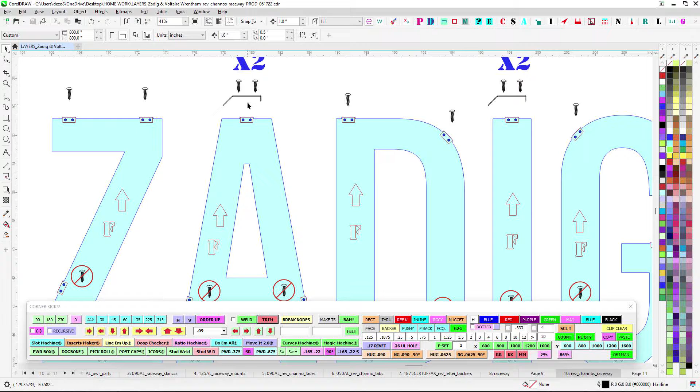So follow this guide. I went ahead and sent this to print out. So you're just going to spring tension where the screws would be visible. Just go ahead and spring tension those, and then like I said, these screws will keep the backers from ever flying out. But these are just to hold the LEDs, and that's it. I put strain reliefs right here so that way you can guide the leash and then strain relief it. You're going to take those leashes and then run them through the top of the raceway through the little hole there.

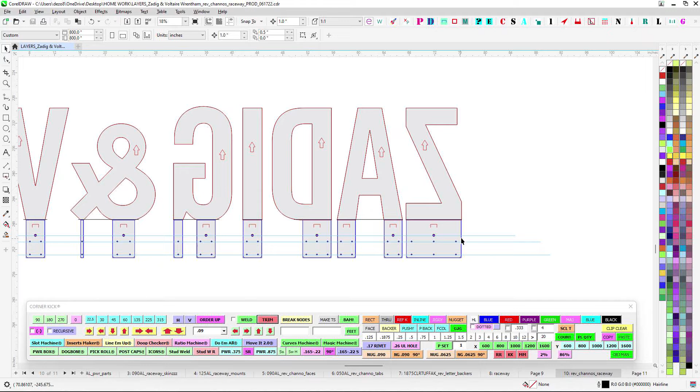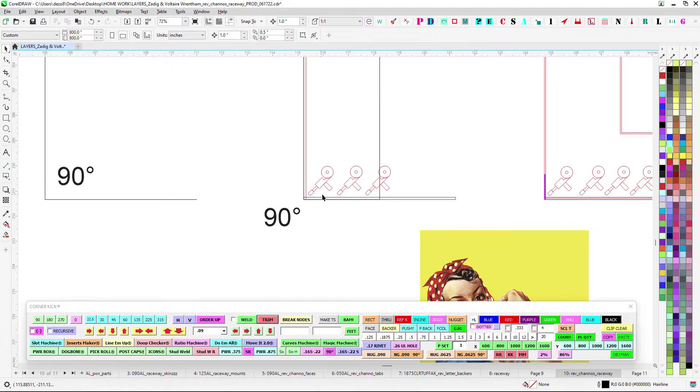And then the channel letters, I already talked to Adrian a little bit, but just to give you a heads up. You can see where this magenta here is the return. And then the blue right here is the flange. So it's real important, you have a 3-inch deep return, but the flange itself is 6 inches. So you want to make sure that you weld this 050 to the 090 really well. And you can go ahead and run some tacks along the actual bend flange as well.

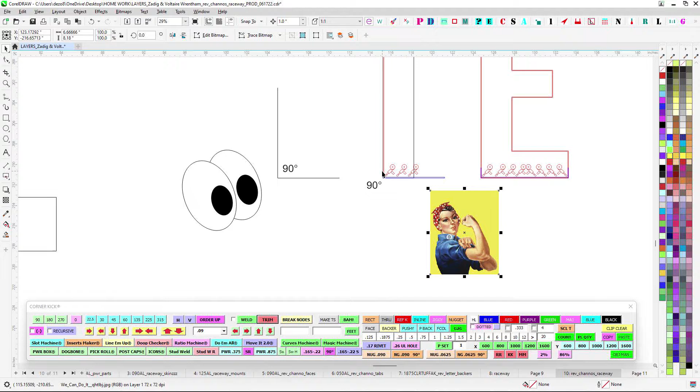I know there's a chance of burn through, so watch out. Maybe put it on a backer piece or whatever for a heat sink. We want to make sure this is nice and strong, because that's what's actually holding the letter up. But you got to make sure that you keep this 90, because otherwise, if it's incorrect, obviously the letters will be crooked, the A and the I and all that will be tilted. So just make sure that you got that welded up nice.

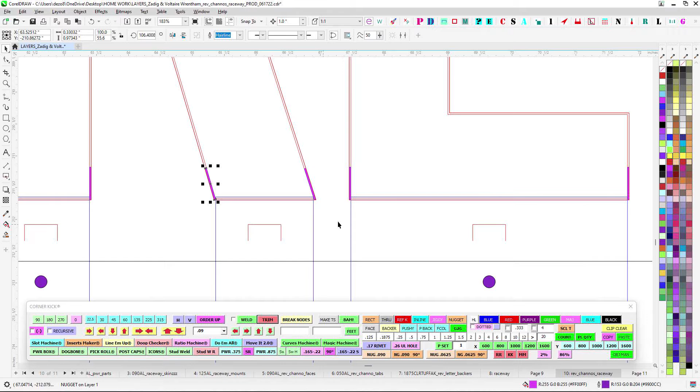What I tried to do is make it so the return could run past on the ones that can run past, so you can make it go long. So like this E here, you can make this piece run long and then sand it flush, and that's fine. The A, all of these are fine. But the round letters, obviously, they have to die into the flange.

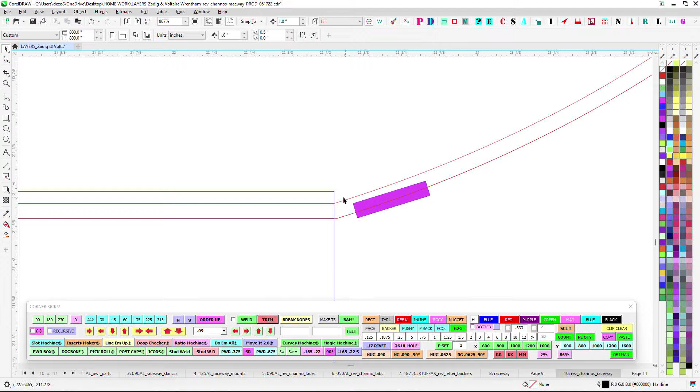Now that presents a challenge because you don't want to have a gap right here. If you have a gap and you try to close it with weld, it's not going to be very strong. Plus, it's going to pull it, and then this will no longer be 90, and you got big trouble there. So you might want to consider starting from here and adding more seams than you normally would. So this one here, I would lay this out, have it go this way, maybe put the seam at top, and then make this one come along. That way you can adjust up here, start fresh, and it's butted up against.

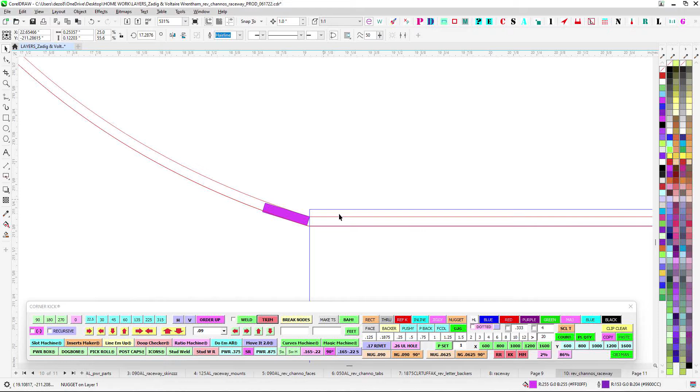That way you can get a nice weld right here. Otherwise, you don't have the luxury of letting this run long and then doing your trim, because if you trim it a little too short, it's going to pull it shut and it's not going to be good. So you want good fitment. With welding, you always want good fitment.

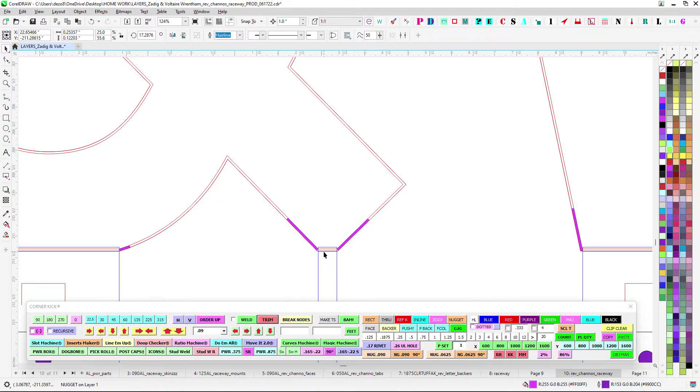Same thing here, it dies up against. So I would maybe put your seam here. So what I'm saying is on some of these, you might have more seams than normal. You'll see what's up. If you guys can get it right there, that's great. But otherwise, I would start this and maybe put a seam here, even though you would normally start from here and go long.

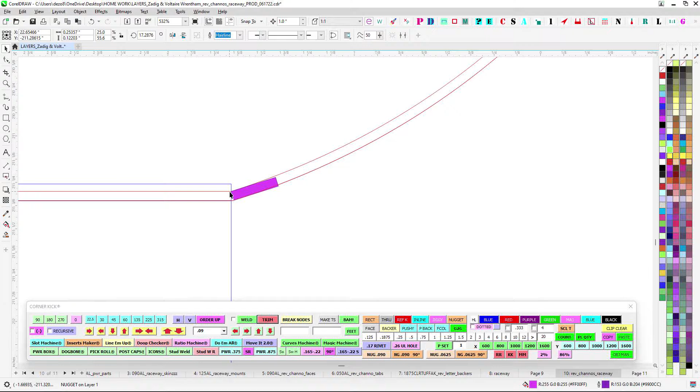But because these die up against, you might end up just kind of going long here and then just put your seam. That way you can have ultimate adjustment and you get a nice fit. So that's all. Just keep in mind, you might do these a little differently because you got to start from down here. On the ones that kind of die in, like I say, the stuff that's long, fine. Anyway, so that's it for the letters. Those are already all sent. I know you guys will knock that out.

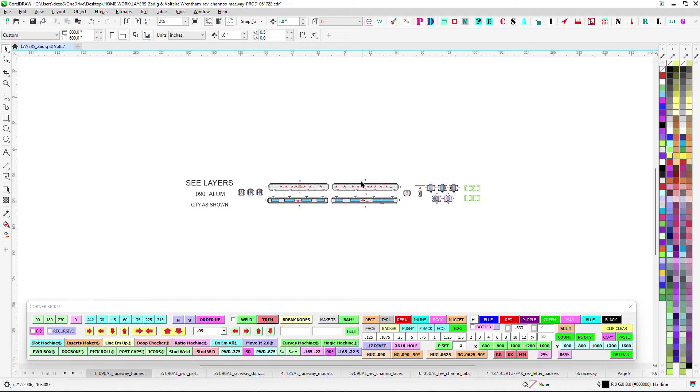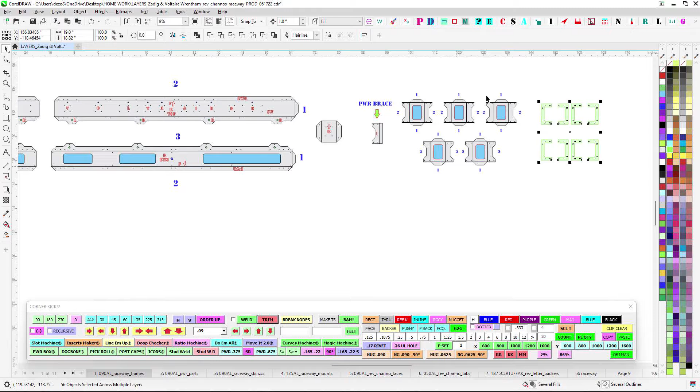So let's get into the Raceway. Let's go to lay of the land. So you got Raceway parts. You got end cap, couple of mids that are on the end caps here. And then for shipping, this is broken into 2 sections. And then you have the top and bottom sections of both. You have the end cap here. And then you have some mid braces, plus a little custom brace. Keep an eye out for that little guy. And then you got your jigs. In the interest of saving time and money, more of like a jigless design. So all your center braces don't have jigs, kind of like the white Raceways.

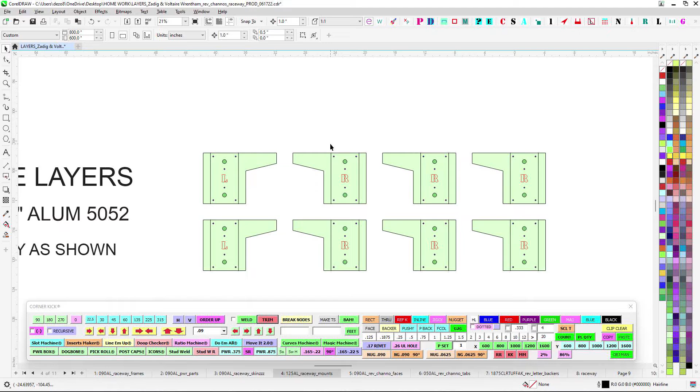We've got 090 power supply box. I'll go over that, super trick, but we got to put the power in the Raceway, so it's just always fun. You got 090 skins. We'll go over that. And we've got some 1/8" Raceway mounts that will go inside as well. I'll show you those. And again, you already got those. I already sent all this, so you got your tabs and all that for your other stuff.

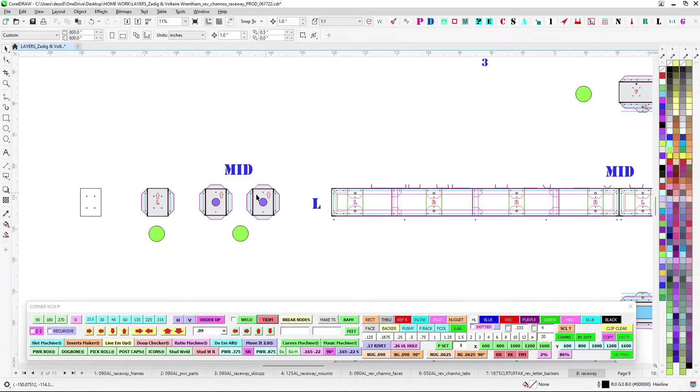Okay, so normal Raceway, quote unquote. None of our stuff's normal, but you're gonna go ahead and put your end pieces in. Again, look for the mids. The mid pieces have the holes here and here. They're exchangeable. They're symmetrical, so either one goes on either one. But I do have like a left and a right. Let's just talk from the start here. We've got the left and we got the right side. So the Zadig and the ampersand will be on one side, and then the Voltaire will be all one word here, and then Voltaire will have power over here. So we'll go over that.

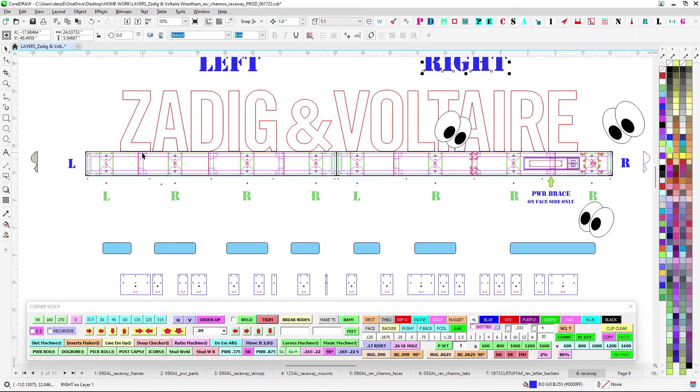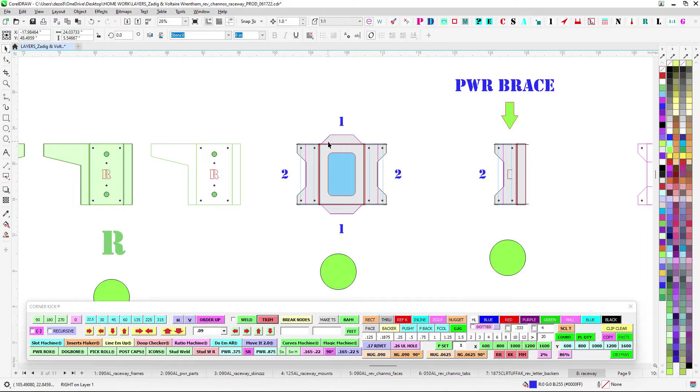So you'll just put your brace jigs in, your corner jigs and all that. And then these guys will fit inside, and you can go ahead and just tack. That's why I have a little example. You can tack on the inside, clean it up, tack along the inside there. This will make this nice and strong. Those guys here are here. They allow power through, all that. The only custom one is this guy here. It's only going to be on the face side, and I had to kind of chop it because that's where the power is going to be. So it's just one of these guys here, but just sliced off. And it's just going to help hold the face together.

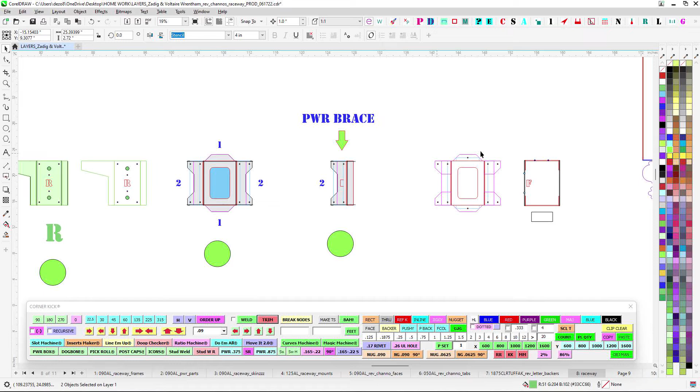Now you see the green here, you got R, R, R, and L, right? That's the back braces. That's where the power or the mounting is going to be. So that's these guys here. Bend these up, and these look very familiar. This will have a long snout that sticks out. That way, yeah, that rhymes. That way this gives full support to the letters. So you'll go ahead and tack that to the front, tack it along like we do. And because that way it fits in the brake, you only have one side and then the other.

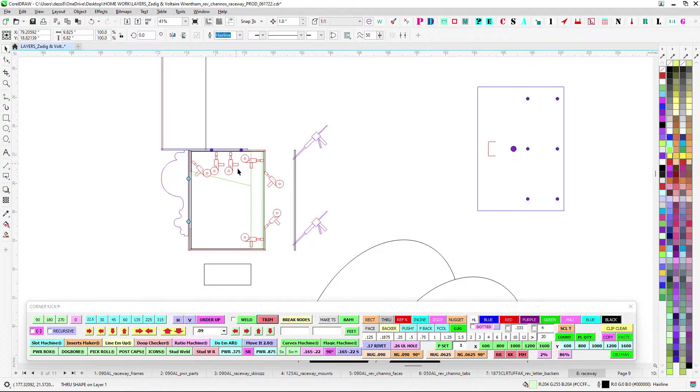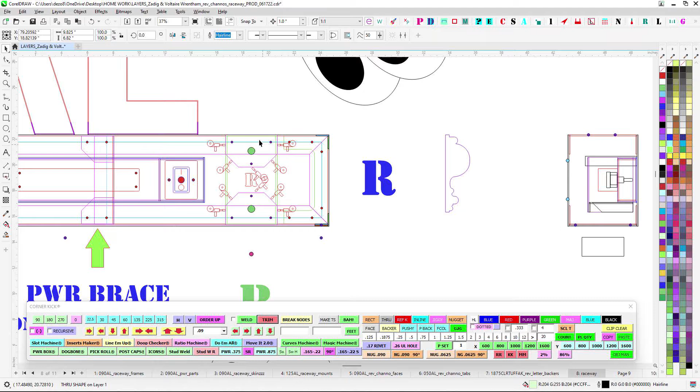So make sure you bend this up. I don't have this marked, but go ahead and bend this up 1, 2, right? You know how we do. Or I'm sorry, it'd be 1 and then 2. Don't trap yourself. So get that welded in. Those go towards the back, and that's it. So tack those in. But also have the back flange pieces that'll come down. So that way it's like a stack. It'll be the 1/8", and then you'll have the hole here. You'll have the 1/8" welded directly to the 090, and then the 090 will be stacked onto the skin. So it'll be a nice, solid, thick metal right there to make sure that this never comes out.

So once you got your Raceway put together, put those back braces in there. You can see where these come down like that. You can tack all along there and kind of clean it up, and that way those braces will be in there nice and solid.

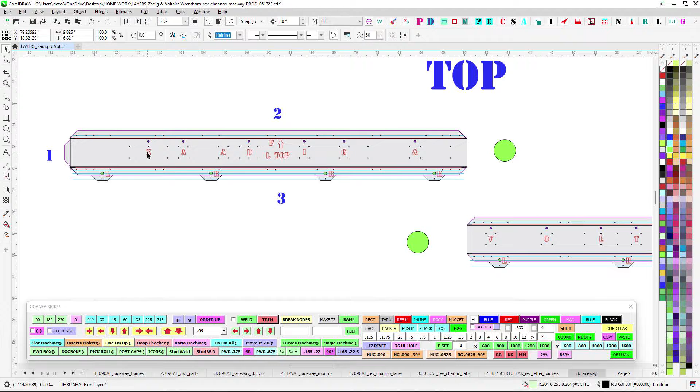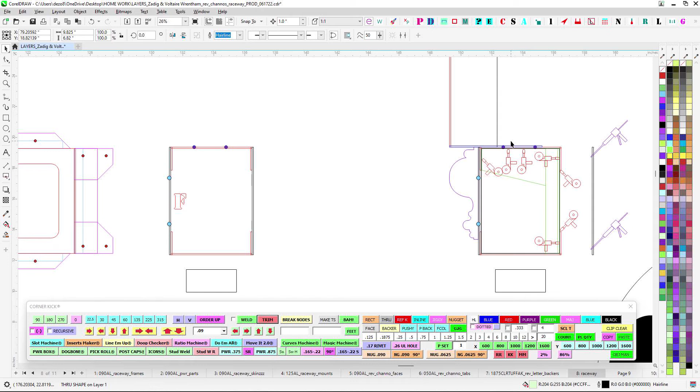I went ahead and put the reference kisses for Zadig and Voltaire all the way along the top. That'll just help you when you look inside to nail down. Now these right here will self-tap from the top, so you don't need to actually access the inside to put these letters on. These letters are clearanced from the top, and you'll just tap those directly down right through here. Boom, boom. Got you plenty of clearance.

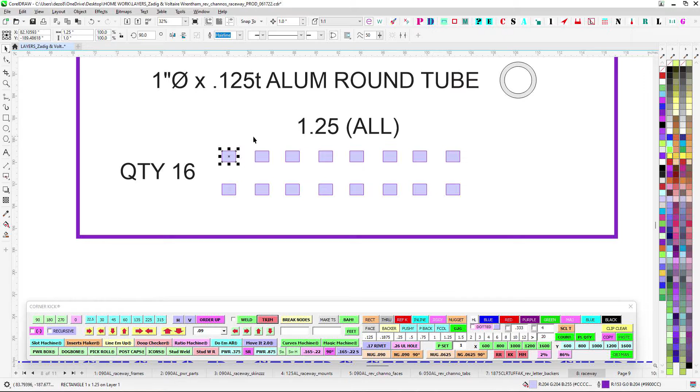So once the Raceway is built, then you can go ahead and put the front skin, maybe put the back skin on first. So you're going to take some round tube, some 1/8. Watch yourself on the saw, be careful, cutting little nuggets. So make sure everything's braced, and these can go flying. So you got 1¼ inch for all of them. You got 16 of them. These are just gonna be little footies.

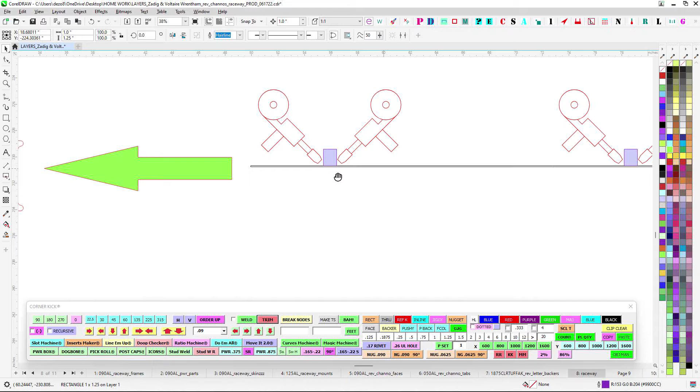So you're gonna tack these to the back side. So I have reference kiss on the inside, 153. So you'll just line up your little footy there. The idea is to not go full weld all the way around, because then this is just going to totally lasagna noodle. But obviously we can't weld after we Lords.

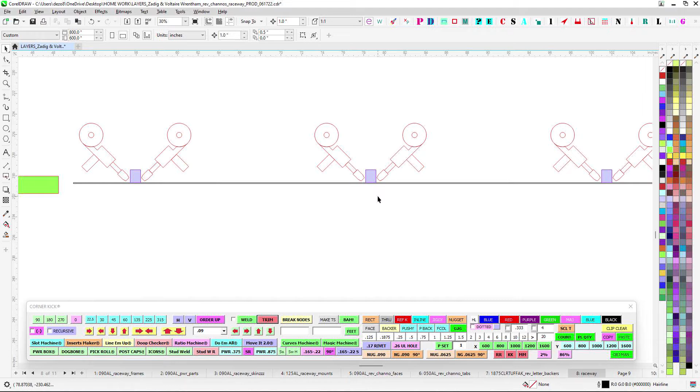So put this down on your table, kind of clamp it down, and I would just maybe do a nice solid 3-spot, just to keep these from coming off. Once they get onto the wall and the bolt is squishing through, it's going to hold it together and live its life fine. So again, don't go full weld around these and get this all wrinkly, because then you got to put this on the back and Lords it down. We want to make sure it lays down nice. So get these guys tacked on there, and then go ahead and Lords up the back side.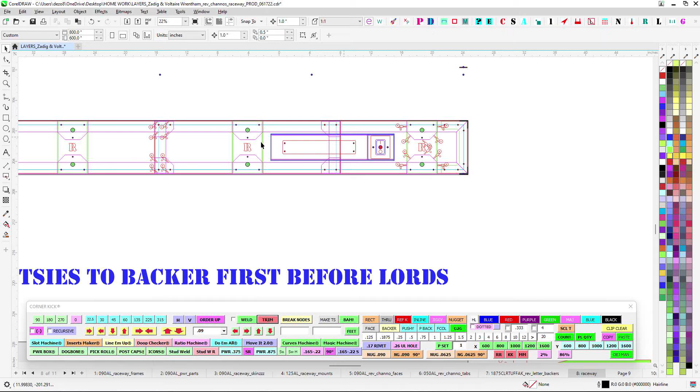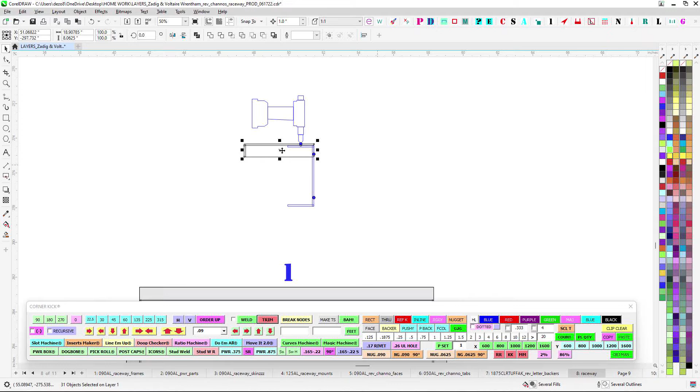And then maybe while you have access, go ahead and do the power supply. The power box is just different. Let's talk about how this goes together. You're going to take the top lid and the backer piece that actually gets permanently mounted inside the Raceway, and rivet those together. So it's like our power boxes. You're going to have this watershed lid, and it's going to go on top. You can see there's only 3 holes there. This is the top of the backer piece. So step 1, go ahead and rivet that together.

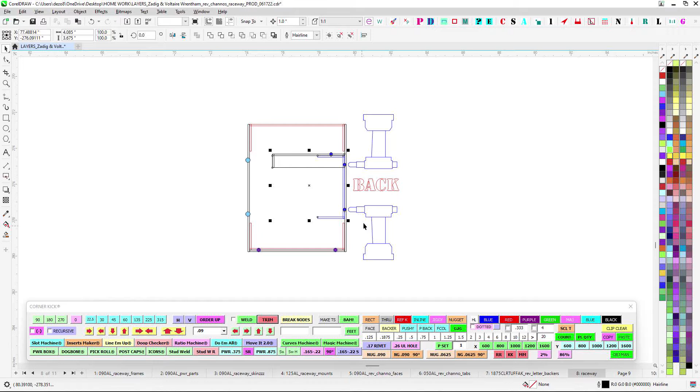And then once you have the backer skin onto the Raceway, you can slide this in. That's why I'm saying leave the front skin off; maybe it's easier to get in. And then go ahead and rivet. You don't need to Lords or anything, trying to keep it fast. You can just rivet this guy; that's what these 6 holes are. Rivet this to the back skin. Now that's going to be basically the holder, accessed from the bottom. These screw holes are going to be the holder for everything.

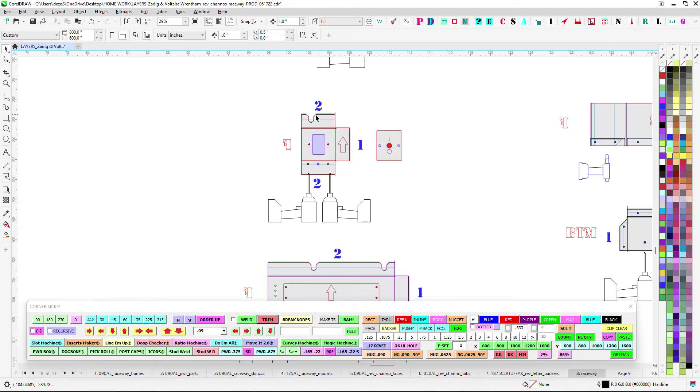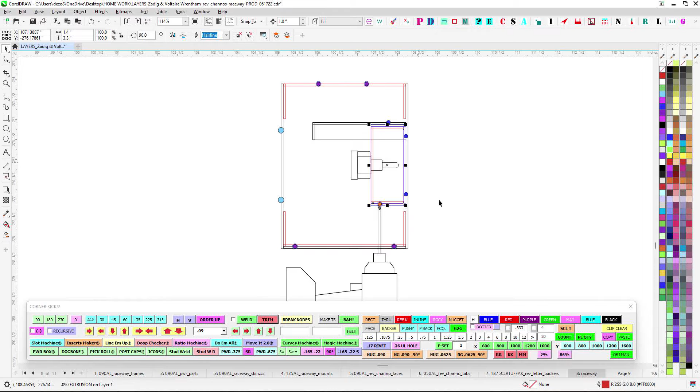So then step 3 is you'll have this little switch guy here, and this is the power supply mount plate box. These are meant to come out so you can work with them, and then you'll stick them inside. The idea is that you'll put the switch in this thing, put it up in, and slide it into the permanently mounted box. Then from the inside you can tap these 2 holes into this holder, and you'll have your holes clearanced. And so then that'll be the switch, and it'll have a plate like we usually use.

That way it's somewhat serviceable in case you ever need to. It won't be super easy, but you'll take the cover off, take these 2 screws, and then take the switch mounting plate out if you ever have to.

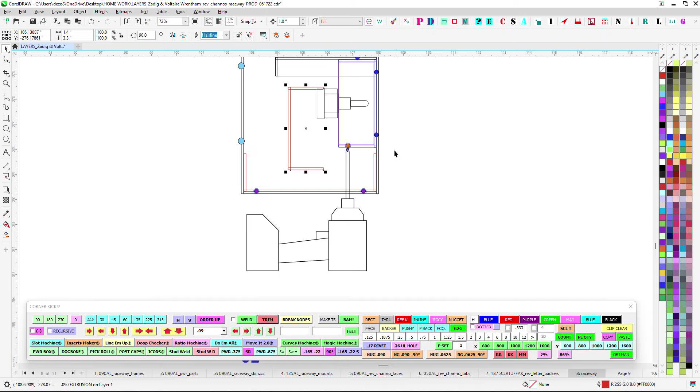Same thing with the power supply. Now I broke those up into 2 so that way you can take the power supply thing out as well. So if you look at it like this is the top view of the switch. So the switch plate will come out, and then you can also take the power supply out.

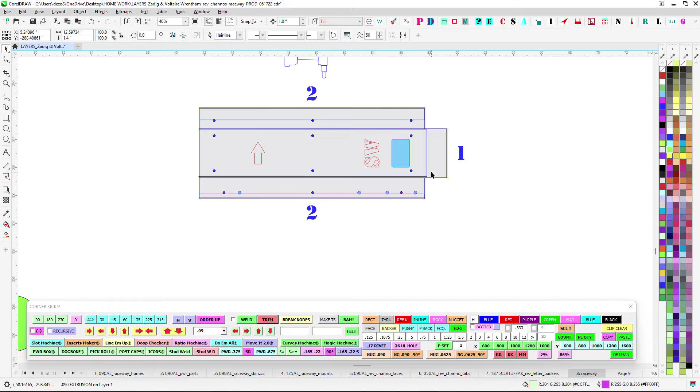The other idea is that you'll see we do a 1, 2, 3 bend. That closes up this end, and then the power supply one has the other end. So that way when you have this all together as one unit, it kind of seals it up. So this is the power supply one, and then this is that one, and the switch. So that way the switch lives in an enclosed box.

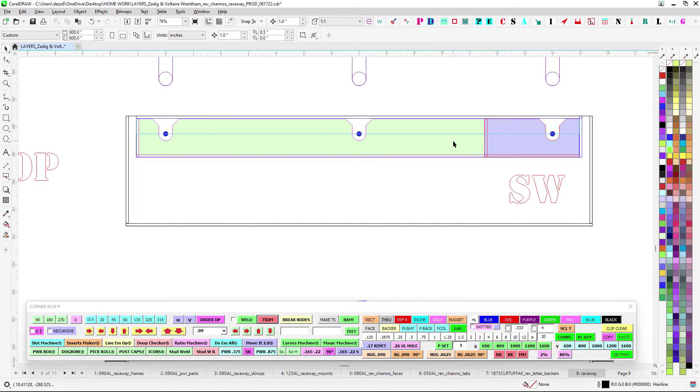That way no bees or anything can live in there. Keeps it watertight or water excluded or whatever. And then this kind of helps close that all up. So then if looking at the top view here, power supply will live right here, and your switch will live right here, no problem. So once you get that in there, that's step 3.

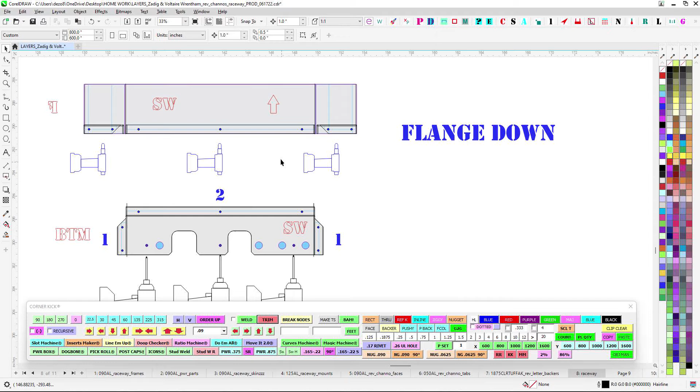And then step 4 is the door. So this is like the cover. So just make sure the flanges are down like we do. This piece here will be the bottom of the cover, and then it'll wrap around the 3 sides. And then you'll just slide that bad boy right up in there like this, bonk.

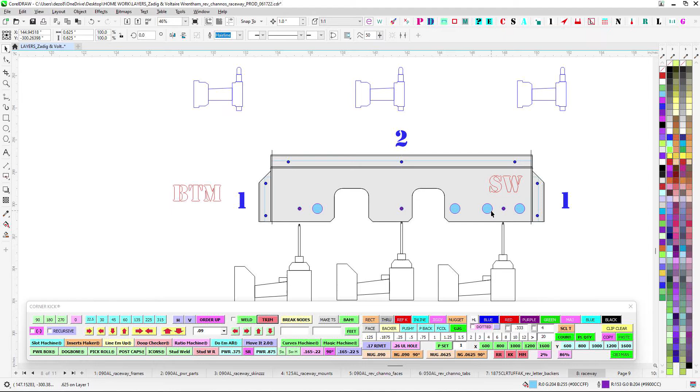And then that'll create watershed like our Mark 6s, and it'll kind of enclose the whole thing on all 3 sides. And then you'll come in from the bottom, and there'll be separate holes that are clearanced. So you'll see these holes here. So these holes are widened for the already switch screws that are there, and these are for the power supply box. And then this is for access for wires, so you can trap the wires.

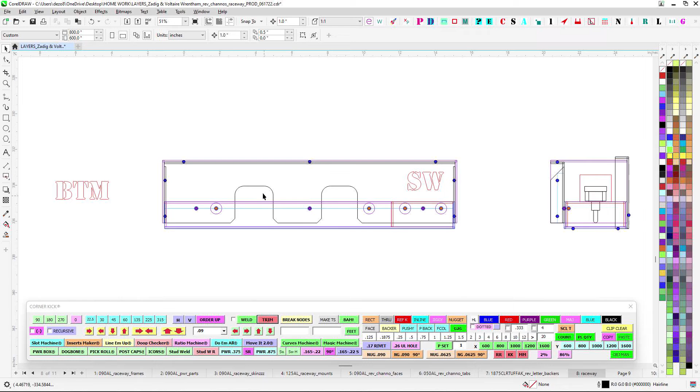So if you kind of look from the bottom view right here, you'll have these 3 screws hold this on, and then these are clearance. The orange ones are for the switch screws, and then you'll have these cutouts right here. So you can collect your secondary out, you can collect your primary out, and then everything will live inside this little box. That's turned 90 there, but yeah, so you get the idea. That'll be the power supply living right there.

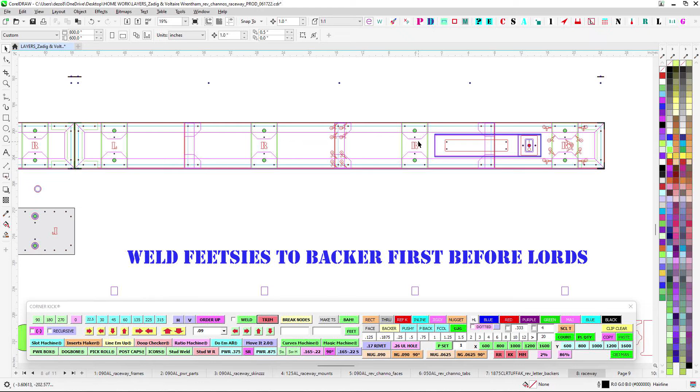So a side view. So this little custom box, that should keep everybody very happy because we have holes all along the top. So this thing's definitely not watertight. Obviously we want to Bondo all the holes shut. And then on the face, I didn't lose my mind. I have these big old holes right down the middle for prep. Make sure these don't get Bondoed.

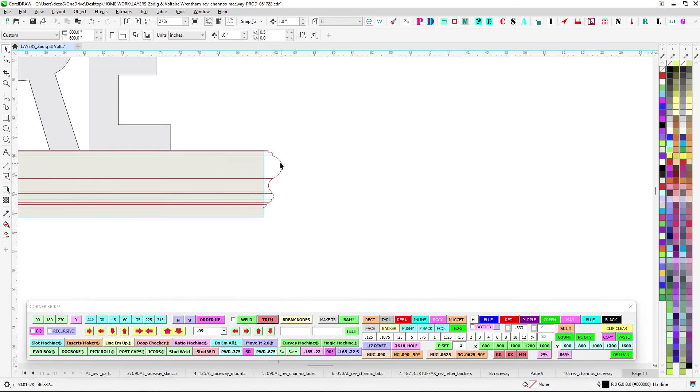They're going to be sticking on some kind of fancy molding. So in order to have that molding fit on there, I got rid of the PDF because it's too big. But in order for them to attach this molding in the field, they'll be able to reach in there and screw that on. Hopefully, that's the idea. So the front of the Raceway is all perforated with these big holes. So that's these guys here. So that's what those are there for. Don't think that I made a mistake and Swiss cheesed it for nothing.

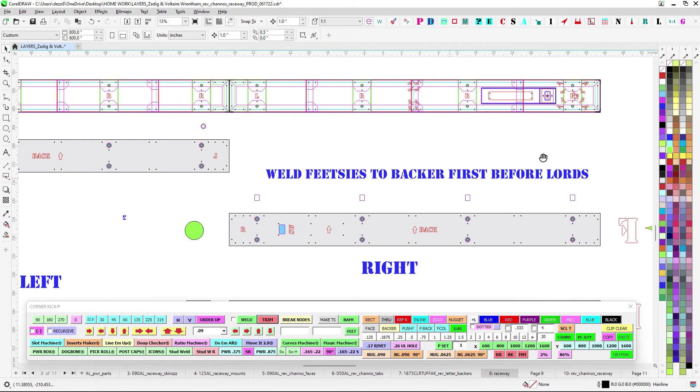So once you get the power supply in there and everything's all nailed down and you like the way this looks, go ahead and lords on your front faces, and then you'll have bottom skin. This is all bottom access. So again, just watch your left, right, and center. I got your UL holes in there already. So we should have everything we need there. So again, it's not the trickiest of raceways.

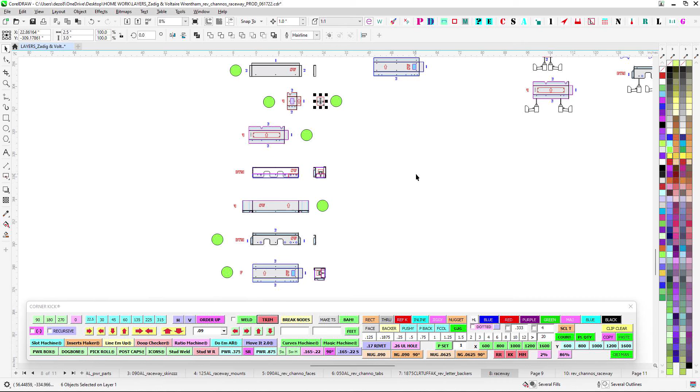As usual, we're taking what we already know and just squeezing that dish rag of ingenuity and getting every last drop out of it with this right here. As much as you might not like this little guy, I'm going to add this to our Mark 6 products. And maybe you might see this again for a Raceway power supply for rear access for the switch. So let me know how it goes. If we like it, we'll keep it going. If not, throw it in the trash like we do.